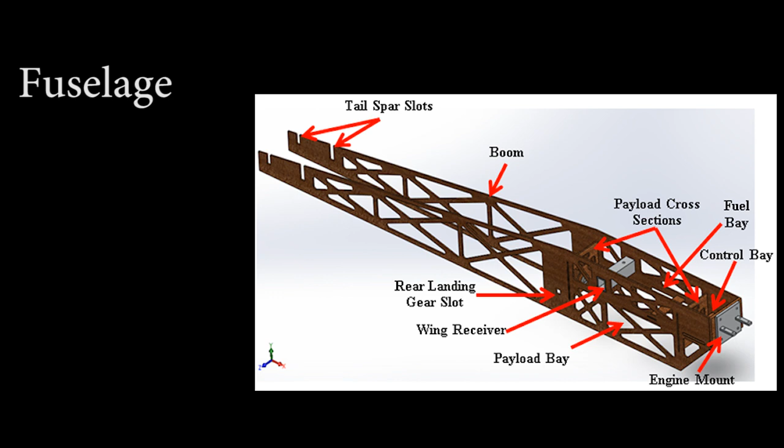The fuselage holds the structure together and accommodates passengers and/or cargo. Modern aircraft fuselages may accommodate up to 800 passengers in economy class and up to 112,700 kilograms of cargo. The cockpit holds the command and control section of an airplane. Modern aircraft cockpits have a number of vital instruments for controlling the airplane on the ground as well as when flying.

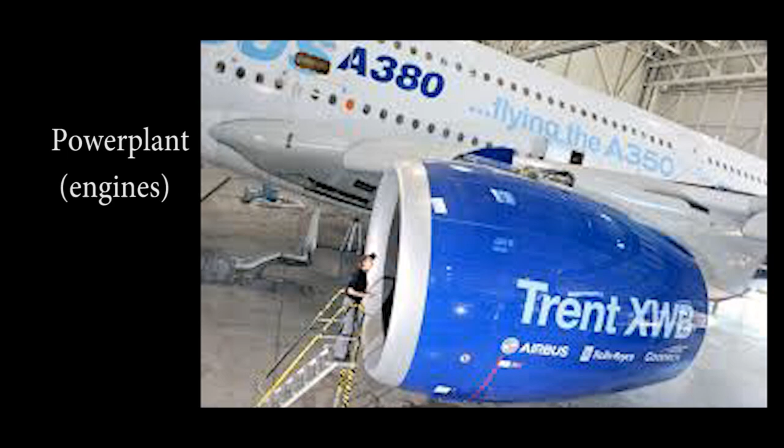Engines generate thrust and provide hydraulic and electric power. Modern aircraft are employed with different types of engines, although jet engines are favored by most commercial airliners.

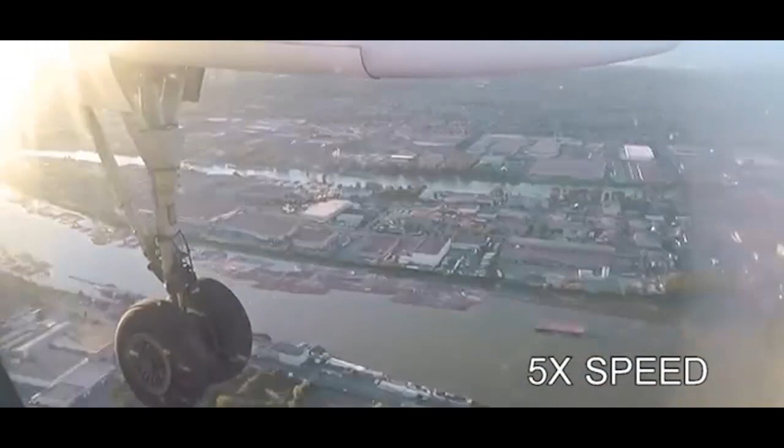The undercarriage, also known as landing gear, provides a platform for the aircraft to stand as well as plays an important, obvious role in landing and takeoff.

Wings generate lift and control the airflow while flying. Wing design is a crucial factor in aviation. A wing is designed to reduce drag at the leading edge, generate lift by its crescent, and manage airflow using the rear edge. Furthermore, while gliding without engine power, the wings allow the pilot to increase and decrease the descent rate.

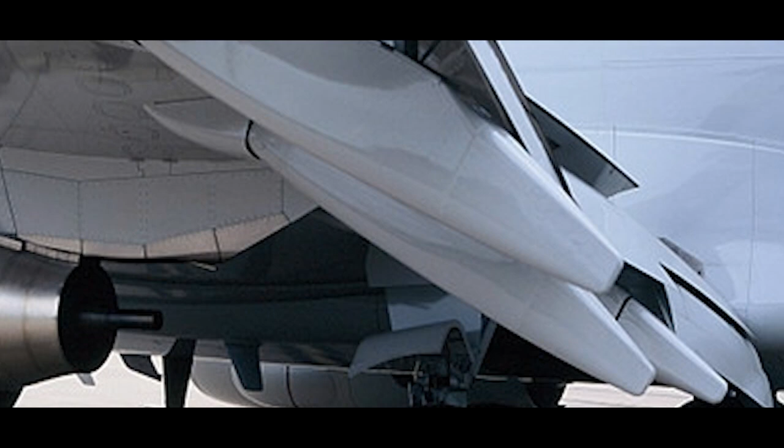Slats adjust the angle of attack of the wings, increasing lift. Slats are fitted at the leading edges of the wings, and deploying them increases the angle of attack of the wings, allowing the pilot to increase the lift generated by the wing.

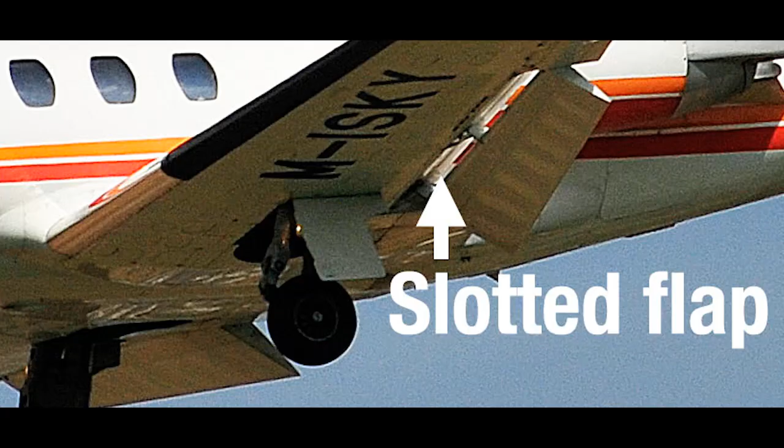Flaps adjust the camber of the wings, increasing lift. Flaps are normally fitted at the trailing edge of the wings. Extending the flaps increases the camber of the wing's airfoil, thus increasing lift at lower speeds, an important feature for landing.

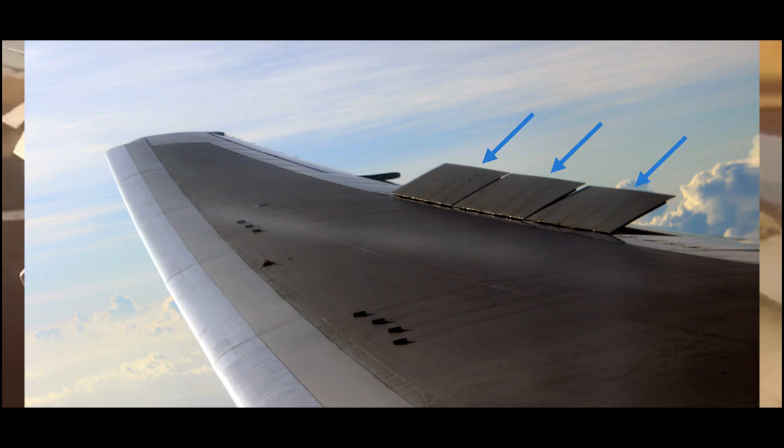Spoilers adjust the camber of sections of the wings, decreasing lift. Spoilers are fitted on top of the wings and are used to reduce lift on a section of the wing in a controlled manner. Spoilers are useful for decreasing lift without increasing the airspeed of the airplane or without increasing drag significantly.

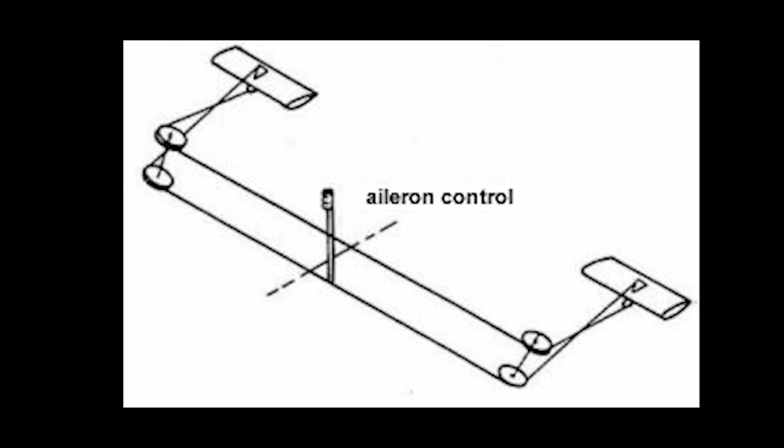Ailerons increase or decrease lift asymmetrically in order to change roll and, thus, move the aircraft left or right while flying. Ailerons are hinged sections fitted at the rear of each wing. Ailerons work asymmetrically as a pair. As the right aileron goes up, the left one comes down and vice versa, thus making the aircraft roll right or left, respectively.

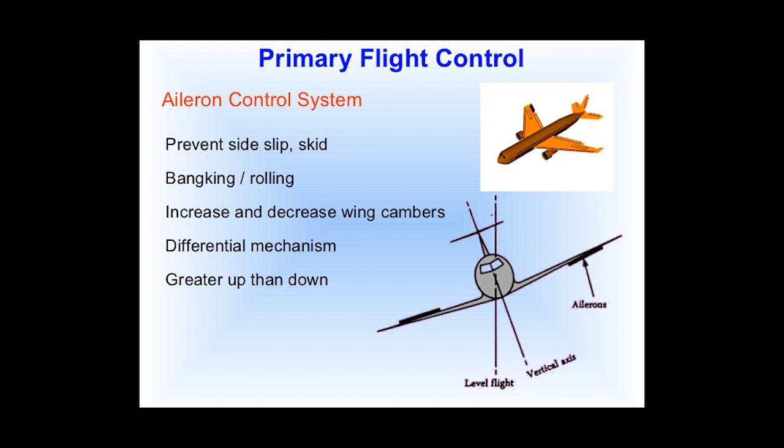The horizontal stabilizer helps maintain an airplane's equilibrium and stability in flight. It does so by providing a mini-wing at a certain distance from the main wings, typically at the back, although it can also be positioned at the front of the aircraft.

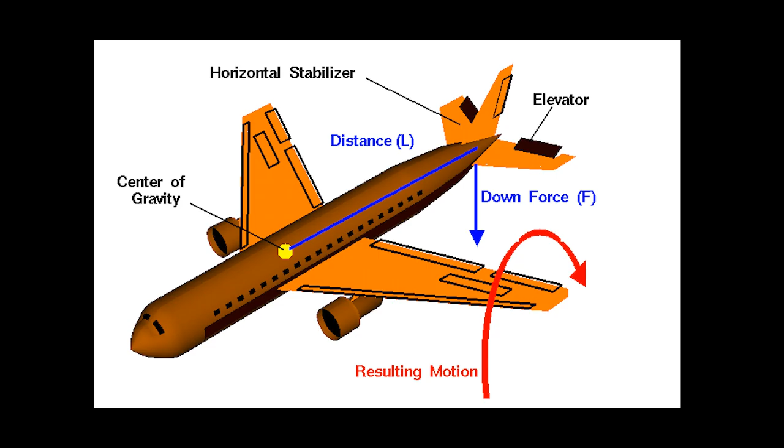This smaller wing produces enough lift to control the pitch of the aircraft and maintain its stability. Although an aircraft without a horizontal stabilizer could, in principle, fly with wings only, controlling its pitch and airspeed would be difficult, as pitch and, subsequently, airspeed can be easily disturbed by air conditions.

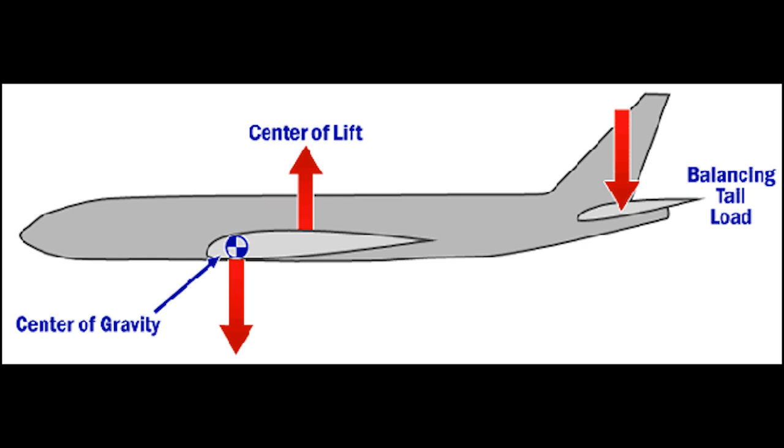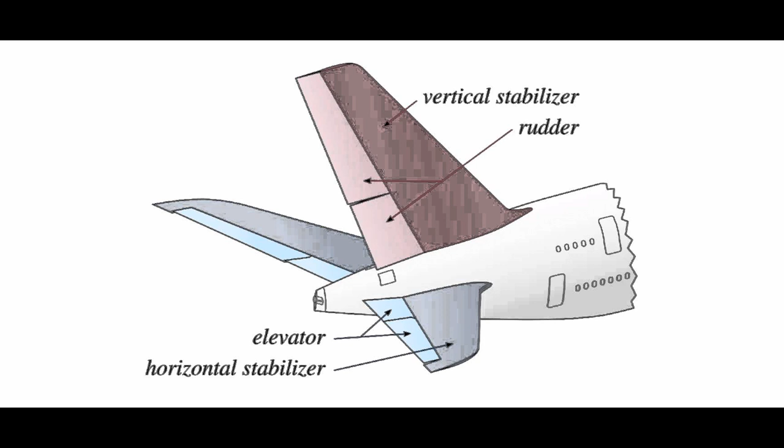As soon as the aircraft pitches up, the tendency is to continue pitching up even further and decrease airspeed, and as soon as the aircraft pitches down, the tendency then is to continue pitching down even further and increase airspeed. An aircraft with a horizontal stabilizer, however, could be flown hands-off, once correctly trimmed, without affecting its pitch and speed.

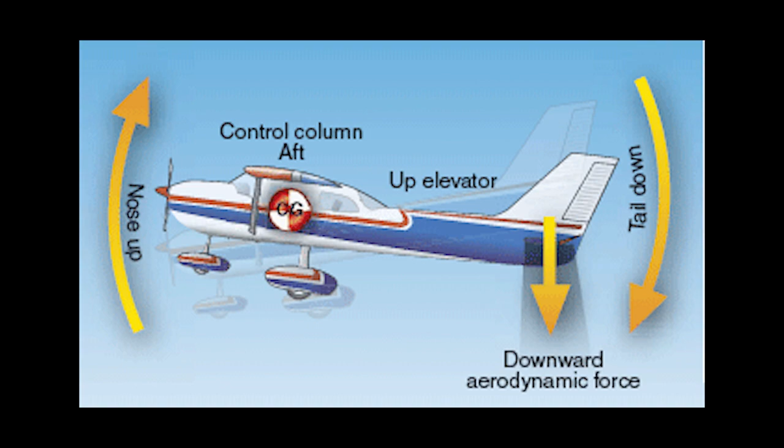Elevators increase or decrease lift on the horizontal stabilizer symmetrically in order to control the pitch motion of an airplane. Elevators are hinged surfaces fitted at the rear of the horizontal stabilizer. They work symmetrically as a pair. When the elevators are up, the aircraft ascends. When the elevators are down, the aircraft descends, and when the elevators are horizontal, the aircraft flies straight.

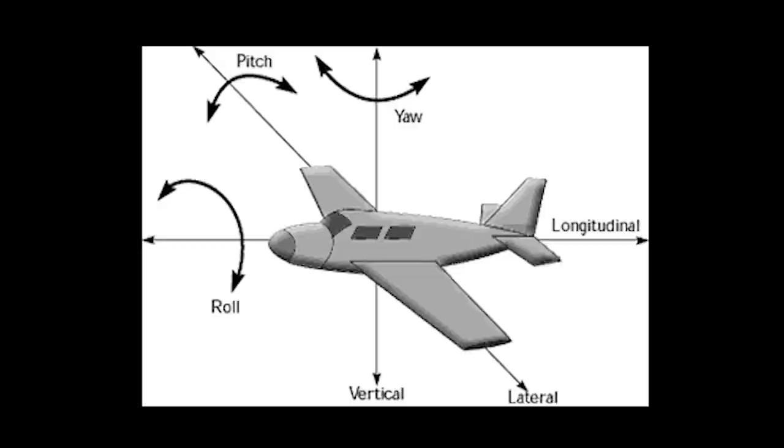The vertical stabilizer prevents lateral movements of the airplane. Without a vertical stabilizer, most aircraft would lose lateral control, tend to slip, increase drag, and become uncontrollable.

The rudder controls the yaw motion of an airplane. The rudder is a hinged surface fitted to the vertical stabilizer. When the rudder is turned to the left, the aircraft turns to the left in the horizontal plane. When the rudder is turned to the right, the aircraft turns to the right.

The rudder is used to turn the aircraft left or right on the ground. In the air, however, the rudder is primarily used to coordinate left and right turns. The turns themselves are done with the ailerons, or to counter adverse yaw, for example, when crosswinds push the airplane sideways.